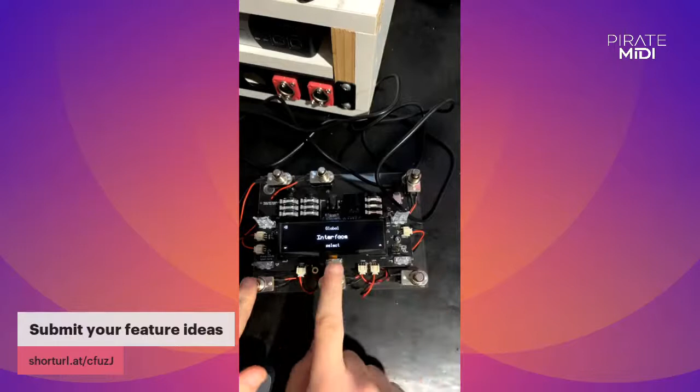So global, we can go here to interface. You can control the LED brightness from here, so you've got low, medium, and high. High is very bright. Simple UI, phone, you can go simple UI. So I'll go back to that - you've got brightness and extended or simple UI.

So we've selected simple UI, hold that to exit, and you can see here now it's just a big bank name. It actually looks a lot bigger in person than it does on that camera feed. But it's maximum screen real estate. That OLED screen is shockingly crisp and sharp, so readable - I can read it from almost 10 meters away.

Yeah, and when you have all 16 characters in that bank name, it's quite large. So you can, we'll go into the menu. As we're discussing, the menu is now accessed by holding in these two foot switches, not just the top left one, to make it harder to accidentally trigger the menu. And it also frees up all of the functionality of that foot switch, which is quite nice.

So we can go to bank name, and we can go through and change this. It's actually really hard to think of a cool bank name on the fly - we'll just add in some special characters here, I guess.

So you get 16 characters for your bank name. Just gonna max it out in a second. There we go. Anyway, we'll max out the bank name so you guys can get a feel for that. And it extends across there, so it's still plenty readable if that was actual letters. Plenty readable on there. We're going to show off some aspects of the configurator, the editor app as well, a little bit later. But for now, I'm just trying to kind of show off the device.

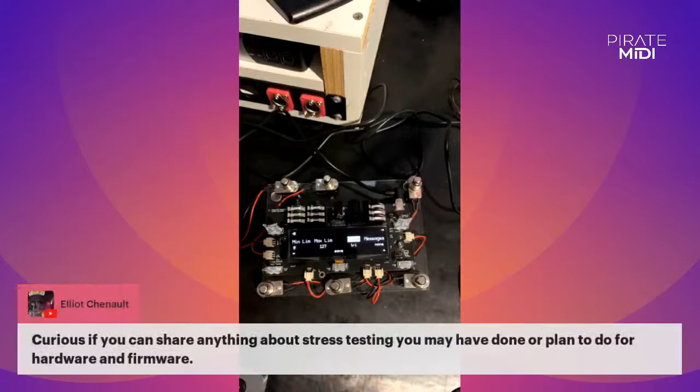Okay, here we go. Curious if you can share anything about stress testing you may have done or plan to do for hardware and firmware. Where's that one? I'm only on Facebook for some reason. Hang on, like the Facebook chat. Anyway, carry on, that's all right.

So, any stress testing? When you are building the firmware, I'm assuming you were testing with large message stacks, that kind of thing, right? I remember seeing some big long lists. Yeah, this is probably more one for me. As far as stress testing goes, I'm not sure whether you're coming at this from a software developer or a hardware developer perspective, just curious, it's a very multifaceted problem. So, for example, if you're talking about hardware and whether it'll stay together under live use, then yeah, absolutely. I gave one of these boxed up to my 2-year-old to play with for the day, and it survived.

It was all jokes aside.

It comes down to things like following manufacturer recommendations for everything. For example, a USB-C connector, how large are your solder pads, what's your reflow profile like. Getting all of that dialed in is how you can help ensure the hardware integrity.

In terms of firmware, it's something that, if you're doing it properly, you really should be doing constantly through the development cycle. So when this was very early days and bare bones, and we were setting up our message stacks, I wanted to make sure that the firmware and the architecture we've created can handle all of that. And yeah, it's running a very powerful, for its size, ARM Cortex M4 processor that handles all of that very, very comfortably. So there's plenty of room to grow.

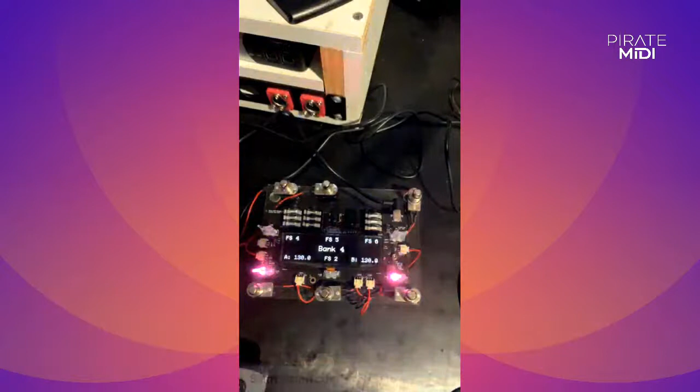Can both independent MIDI clocks be set so that they're synced, for example one is double? Yeah, good question - they definitely can. It's been on my to-do list, a little bit lower priority while trying to get some other stuff done. But absolutely, that's not overly difficult and is on the roadmap, where you can sync one to be a subdivision of the other, so slaved to another, or completely free running. I think that's really important from a functionality perspective.

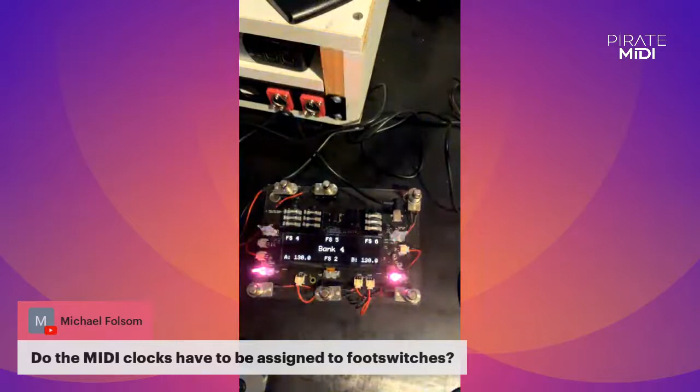Elliot asked a similar question through YouTube - I think it's pretty close to the same question: allow for MIDI clock subdivisions. In fact, most pedals don't necessarily allow for that - a lot of MIDI clock pedals don't allow for subdivisions. It's very common with tap tempo, but not so much with clock. But yeah, Dean, you rock on, mate.

Michael asks, do the MIDI clocks have to be assigned to foot switches?

At the moment, yes, because I've thought quite a lot about this, and I think it's a bit of a toss-up between creating a really nice user experience. One of our goals and the whole vision behind Pirate MIDI is to take away that confusion layer where there's so much going on behind the scenes that you aren't really aware of or in control of, and just make everything streamlined, powerful and easy to use. Part of that was making MIDI clock functionality front and center. Perhaps we might look at adding a user interface element on the screen which could display the tempo information, triggered externally. You can imitate and remotely control a switch with an external foot switch, which I'll show off in a minute. For now they have to be assigned to a switch, but we can look at what's the best user experience for that, for sure.

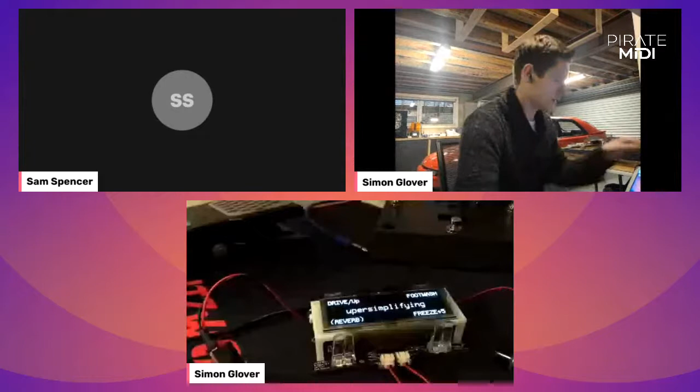But Simon's got... Yeah, let's see what we can do here. Simon, I'm getting some feedback ringing with your laptop. Yeah mate, you might want to just... that's what I figured. I really wish it didn't have to do that. You also are a member of the Potato Pixel clan. Am I? Just a sec. That's better. Oh okay, it's not great.

That's a Bridge4 board there. You can see Simon's got the white display mount, which was one of our samples that we got in, and I sent it over to him. The final production units are black.

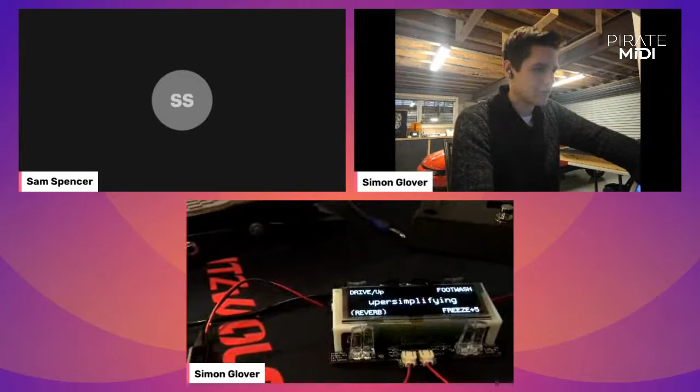I'm gonna do it, platform. Stuff it, so apologies, I'm gonna go handheld. Here we go, okay, let's... whoop. How's that? It's a thing. Yep. Can't hear you anymore. Yeah, can you hear me now? Yeah, I'm talking, I'm just trying to make this thing work. So is that camera readable? Yeah, that's fine. What are you showing off there?

Okay, so I was just going to do a factory reset and go back to the other UI. Here we go, I'll set up my tripod now. Turn this down. Okay, I don't have quite as smooth a setup as Sam, but we'll get there. System reset, factory reset. Yes. I can go around this way. I've got my camera back online too.

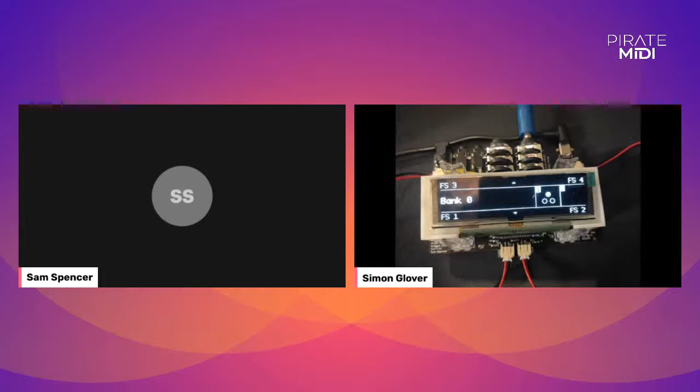And I'll go back out to the menu, and you'll see we've got these three rings here, and when I press a foot switch, it shows us that it's being pressed. Do you want to show that switch in the shot, Simon? It's a little tricky to see what's going on. Okay, so if I press a switch, the corresponding button there lights up. Yeah, I might just maybe clarify what's going on there a little.

So part of that display area you can see there is each Flexi port gets its own bit of screen real estate in the extended UI. Sorry about the potato camera quality. This is something we're still working on and tweaking, but it's really coming together nicely, where depending on what mode the Flexi port's configured in, that section will automatically change. So for an external switch, you've got three different switch options, and because you don't have dedicated LEDs for those on just a standard passive external switch, you actually get an on-screen indicator of what's happening with the switch, which is a really nice additional user interface element.

Let's plug into the other FlexiPort, which is going to wig out that UI there, but we'll just go into the other FlexiPort here.

This is really cool. We've been working on this for the last week or so, adding some nice bits and pieces. In device link, it will show whether a particular port is connected to the network and configured, things like that. So now we have the expression pedal.

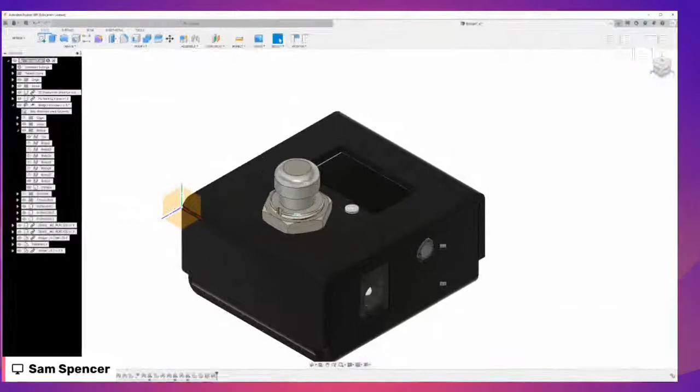But what I might do is share my screen so I can show you guys some cool stuff, because we've got a number of really exciting things that we're working on. So I'm going to share my modeling window. I use Fusion 360 for a lot of our design. Let me turn those joints off. It's not perfect by any stretch of the imagination, but it's what I'm used to and it's what works well.

Sorry, what's good? Sorry, Kira's just loading some print paper up. My wife's trying to print stuff. I'm on a live stream at the moment. What's the matter? No, we're not done. Yeah, if you can do that. Thanks. Love you. Sorry about that, guys.

Kira's great. She runs a sewing business doing kids' clothing and things like that, so she works from home as well. I'm just going to bring my front camera back and chat with you guys.

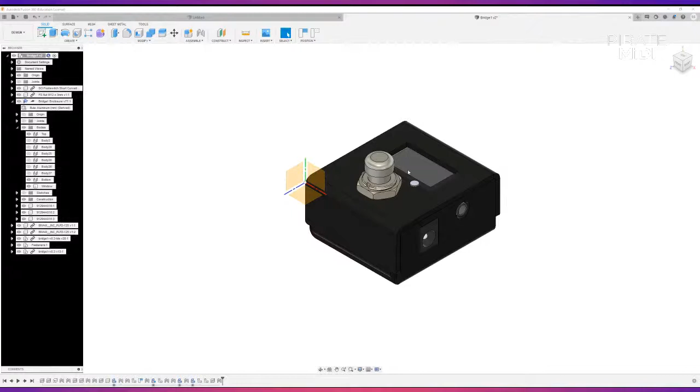There we go. So yeah, we've been working on a lot of different things in the meantime, and because we've had that time, it's been a bit of a nice silver lining to that. If you're in our group, you will have seen that fairly regularly. We love to post new ideas.

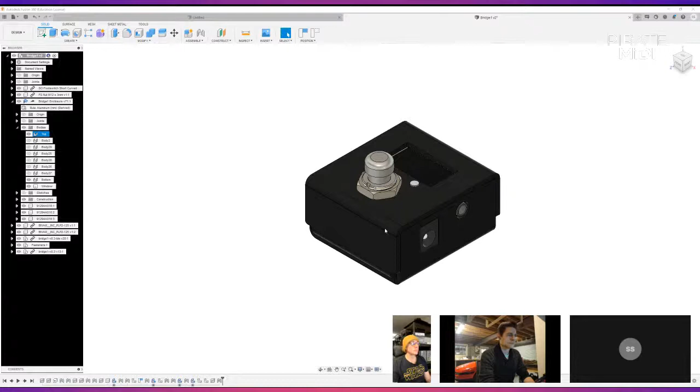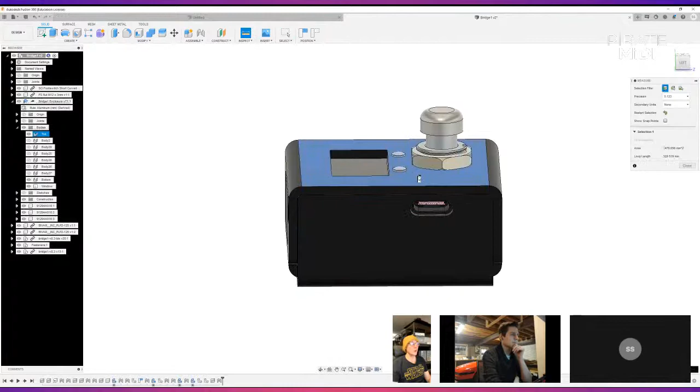And if not, here is one of them. So this is our Bridge 1. This has been something we've been working on for quite some time. You've got a whole bunch of ports, and we've sort of leaked a few bits and pieces, but this thing is tiny. To give you an idea, this is a custom enclosure for this. It is 50 millimeters in length, and it is 44 millimeters wide, but it is only 25 millimeters tall. So this is crazy tiny.

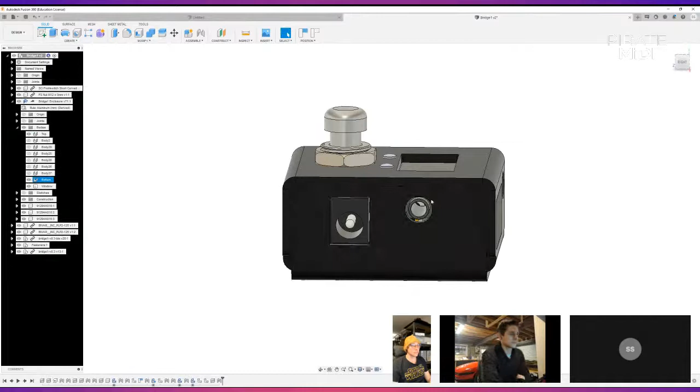That is a high contrast OLED screen there. You've got USB-C. You've got a dedicated MIDI output there. You've got one Flexi port, so you can have up to 2 expression pedals, external foot switches, all that goodness. Your DC in, again, can be powered from DC or USB.

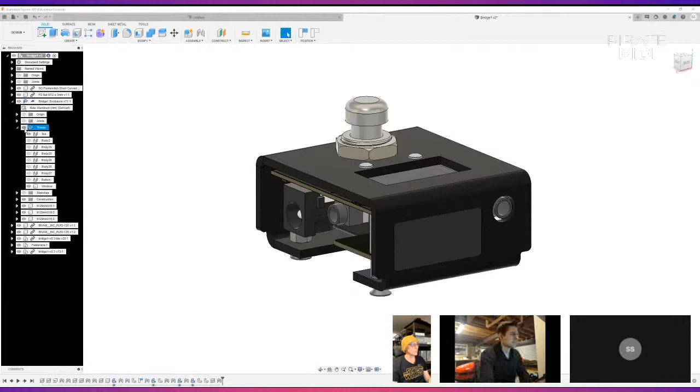And then you might see this and say to yourself, that's weird, what's going on there? It's not a screen, is it? No, and to you I would say, well, let's just take this enclosure off and get all naked with the thing under here. And you see this very deliberately grey box, and that is one of my Bridge 1 prototypes. That, my good people - he does this a lot, flies off to some shelf somewhere - is a Bluetooth transceiver.

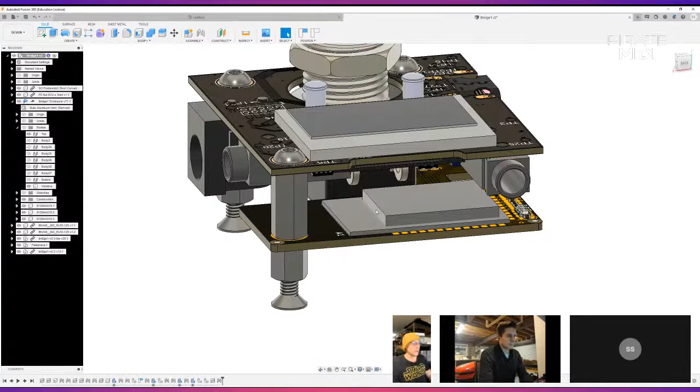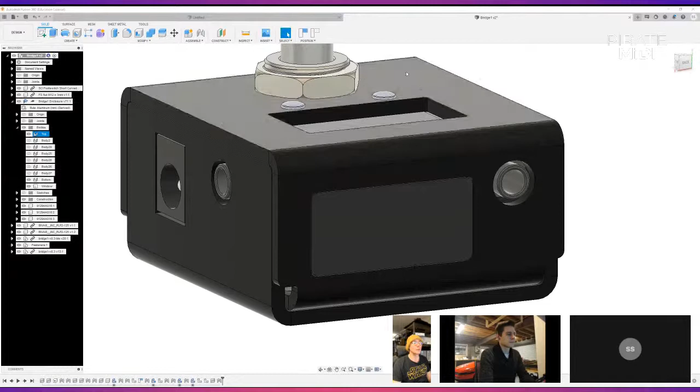So the Bridge 1 is actually going to have integrated Bluetooth, not just integrated Bluetooth, but it actually has WIDI on board. We've been partnering with the guys from CME, which we're really excited about. And the Bridge 1, in addition to everything else, has full WIDI embedded right inside. Now this is cool for a few reasons. One, you get WIDI for free. Yes, it's a wireless window, so to allow for best possible Bluetooth reception, the metal enclosure is basically a Faraday shield, and it will largely attenuate your wireless signal. So you have gaps, a flush plastic section to allow your signal in and out. But along with having WIDI built in, our goal is to have the configuration app available on mobile as well, and things like that. And obviously you can connect it to other Bluetooth devices with all the goodness we love there.

Because it's built in, it actually communicates with the main processor at a much higher frequency than standard MIDI, which is what your external MIDI devices allow you to do. And that opens up the possibilities of device link over Bluetooth, because you can stream all of that data without as much latency. It opens up a huge number of really cool and exciting things, which we're really excited for.

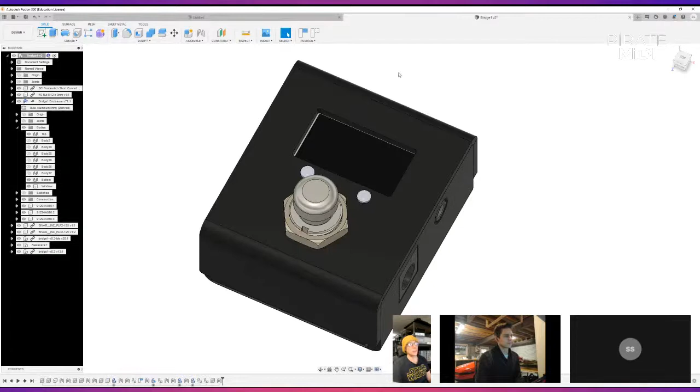So the light pipe looks a little bit different because it's a much shallower enclosure. You still get your dual color LED indicators and things like that. Yeah, that's the Bridge one. She's a tiny little thing, and we're very excited. Those are light pipes, they're not buttons on there. They're just some small domed light pipes on there.

Michael, good question. So we've got the Bridge one. Now, we're not going to spill the beans on everything today. We've got about 5 or 6 projects that we've had in the works over this year, working on in the background. I'd say 4 of those are going to be coming very soon.

But to back up a little bit, to give you an idea of our timeline, I'm going to take that beanie off. It's getting a bit warm in here.

We're hoping to ship out some tester units to a couple of guys later this month, or maybe as early as next week. Then we're going to be shipping all of you lovely people your Kickstarter backer units, existing pre-orders, and things like that. Then we'll be putting the Bridge 4 and the Bridge 6 in it.

Simon, what is that? No, don't know. Okay, don't stress. Okay, very loud.

We'll be putting the Bridge 4 and Bridge 6 up on our website for pre-order for the next batch. Now we're hoping to go to regular manufacturing. So what this will be is we'll take stock of any feedback from all of you guys, make those changes and additions in firmware and the config app, and then basically sign up to pre-order on that. If you haven't already secured one, that will be our regular manufacturing of Bridge 4s and Bridge 6s. You'll be the first to get one of those, which is going to be cool.

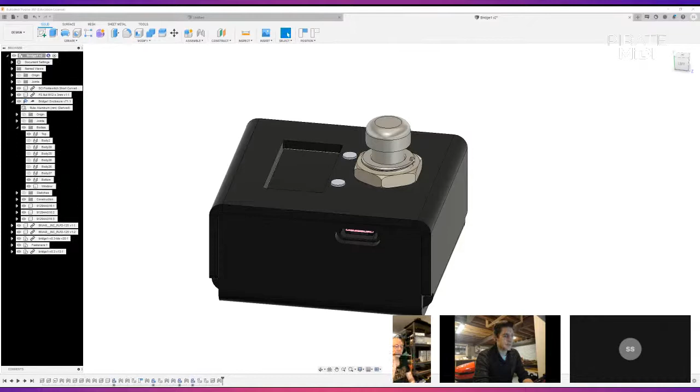For those of you who don't know what the Flexi Hub is, it's got 16 3.5mm TRS jacks. It's in an enclosure, I can't remember the length and width, but it's barely thicker than my smartphone case. When it's in the enclosure, it's very cool. Can you see it? So yeah, I'm just going full screen.

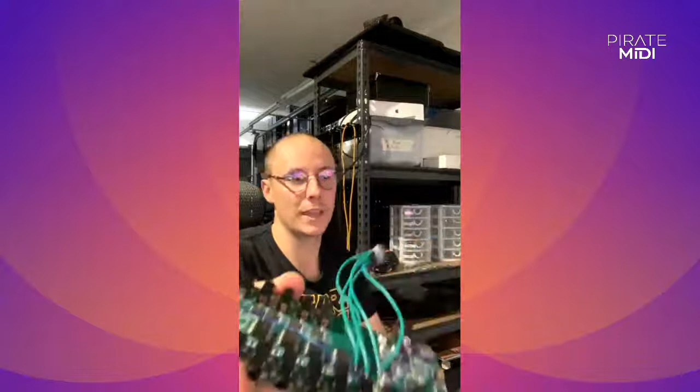Before we move off the relays as well, what that means with TRS is you actually get 2 relay switches for the price of 1, in a sense, in that it's not just a mono cable switch.

You actually get independent relay switching of the tip and the ring as well. So you could use a splitter to control 2 different TS channel amps, or if you have an amp or another device that uses a TRS foot switch, then you can fully control that as well. So that's pretty cool. But yeah, this is the board here with all those jacks.

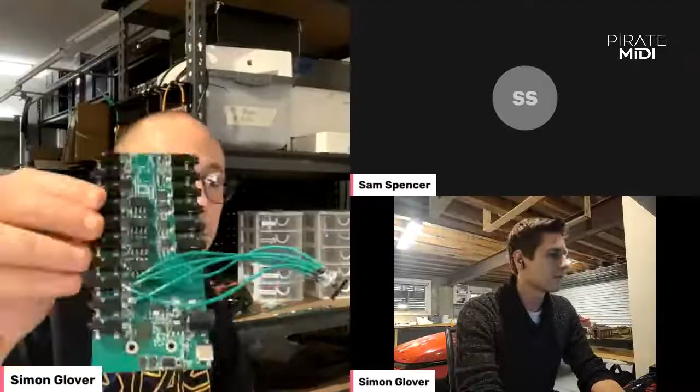Again, ignore those wires, they're just programming headers and things like that. We've had this in prototype for a while. We've just been waiting for the supply chain situation to stabilize a bit, but that is also going to be coming very soon to you guys. We've managed to work out most of the kinks in that. It's mostly due to the microcontroller stuff, right? Yeah, one of the shortages.

One of the really neat things about this is it runs what I'm calling the filter and transform engine. What that means is you've got all of these different ports - raw MIDI, expression pedals, control voltages, external foot switches, the works. The filter and transform engine allows you to have a matrix of inputs and outputs. So an input might be a MIDI input, and then an output might be a control voltage. On your MIDI input, you can assign MIDI triggers, you can do all sorts of things like that, and then you can route it to any of the other output ports in whatever way you like. For example, when this MIDI input receives CC 100, send this control voltage to this expression pedal output. You can do that for every combination of inputs and outputs, all simultaneously.

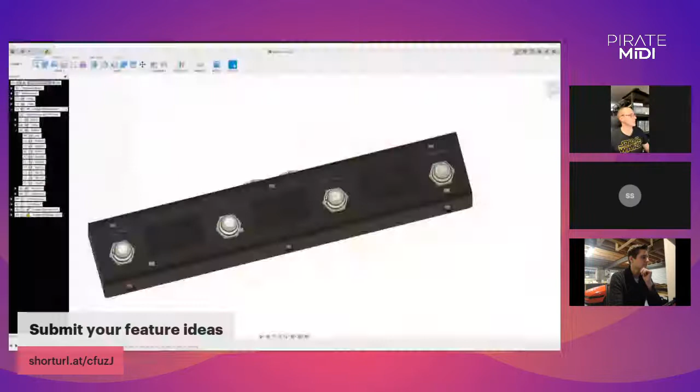So we have here something we teased about in our group a little while ago. Ignore, there's no screen models in there, but that's where the screens are. We have a Bridge4 Slim.

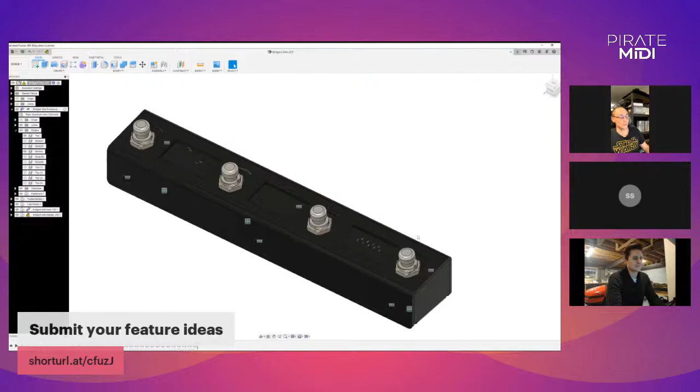Now this guy is super cool because it's like a single row MIDI controller. Now you get all of the power of a Bridge4, which is all the power of a Bridge6, in a 4-foot switch format, in this really skinny single row form factor to put underneath something like a Stomp or your large big box devices.

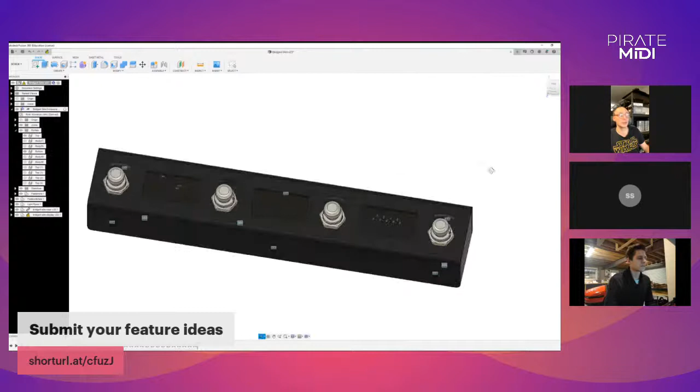And you actually get 3 displays across here to show a ton of information on. So super cool. You still get 2 FlexiPorts, your MIDI in, your MIDI out, USB-C, DC input, all that goodness, and your dual light pipes for the LEDs there.

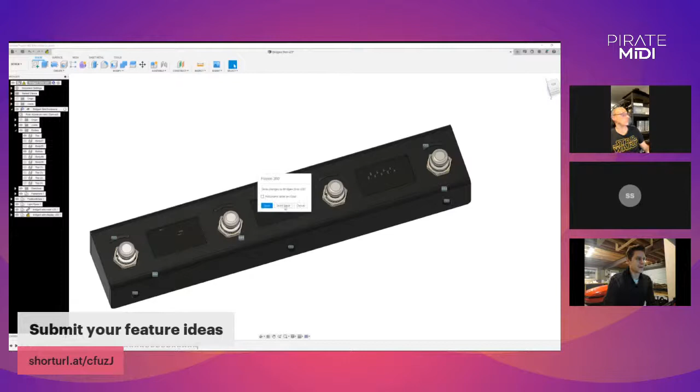It's been a lot of fun to design them. That is going to be coming really soon as well. Stay tuned - because that doesn't need anywhere near as much development time.

Yeah, it's a Bridge4 with a different enclosure and a different screen layout. Take your Bridge4, you squish it down, you get a Bridge4 Slim. It's beautiful. Beautiful. Yep, poetry in motion.

Yeah, so things like those injection molded parts are all the same. So it's just the enclosure, testing PCB layout, and that's pretty much it - adjust the firmware for those 3 screens.

Something you might not realize is that creating the form factor for our bridge devices has required a lot of injection molding, and injection molding plastic is really expensive and takes a lot of time to get a mold done. For something like a light pipe, we have a taller version and a shorter version to match the slanted geometry of our enclosures. We've done several iterations of these. You have to get a mold made, which costs thousands and thousands of dollars, then you have to get your sample runs done. It's a very complex process getting injection molding tooling done.

I think the file iterations on the light pipes got up to like version 55 or something. Oh yeah, but that's nothing — some version iterations get up to hundreds. It's pretty crazy with files going back and forth between the manufacturer.

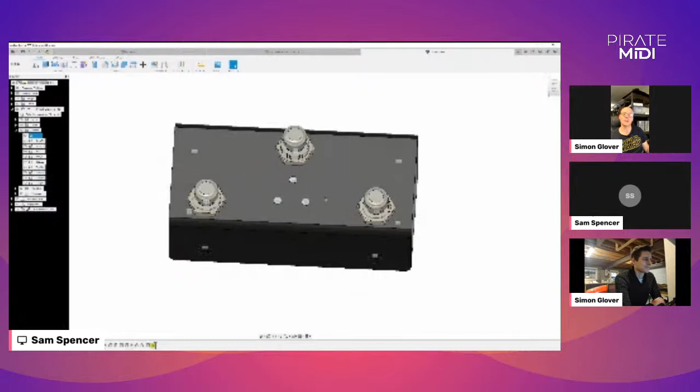And then I actually thought a bit more about it. What I wanted to do was our own take on an external auxiliary foot switch, but with some secret sauce — and that secret sauce is, it's actually a MIDI controller too. You might notice this little 3-dot layout, very similar to the user interface on the Bridge that Simon showed off with his external foot switch, and that's because it is. This is a powered device — I'm just showing the enclosure here so I don't give too much away. I can even show the PCB here too. This is a very cool little device.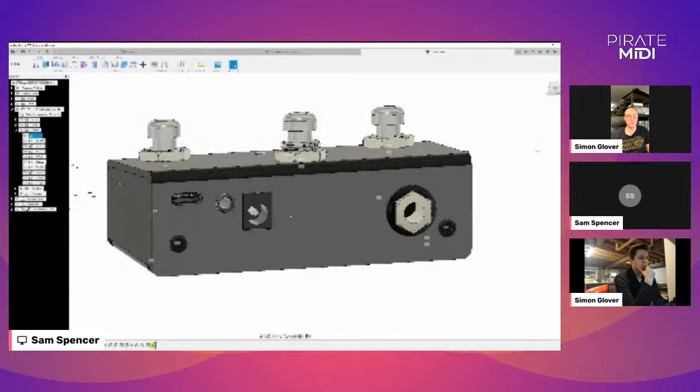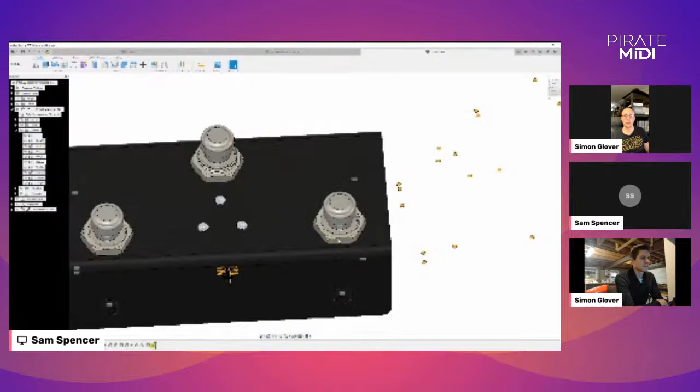You can use it in a couple of different modes. One, it can be unpowered and just be an auxiliary foot switch — the LEDs won't light up, obviously, but it will just plug into your devices and be a really nice, perfectly spaced, slanted enclosure external foot switch. Or you just power it via USB or a barrel jack input, and you get LEDs on there as well in real time showing foot switch behavior and things like that, even when it's just acting as a generic external foot switch on any other device.

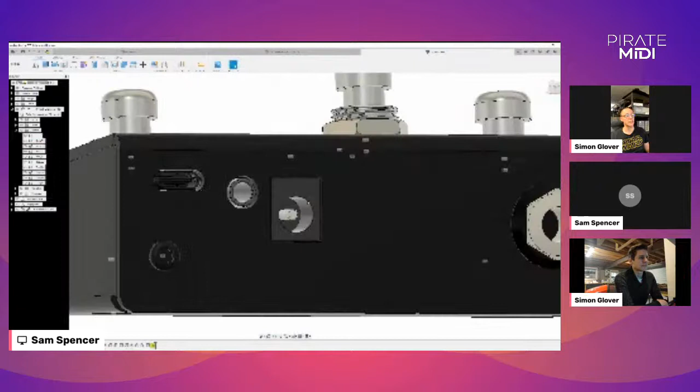But it also has a small brain in there, a microcontroller, and some of our Bridge architecture, so that you get USB-C, a dedicated MIDI output along with the auxiliary switch output. So this, while not having the same power and flexibility as a Bridge controller, gives you a MIDI controller with some message stacks on there, USB-C, all that good stuff. And we're really hoping to hit that sub $100 mark with this device. So if you need a simple, cheap and cheerful MIDI controller to do a couple of things, like maybe a MIDI clock and some bank up and down, that might be a great option for you.

Or you want it can be an auxiliary switch at the same time as a MIDI controller, so you could have it being an aux switch for a non-MIDI device, and then also sending MIDI data to your other MIDI devices via the MIDI output.

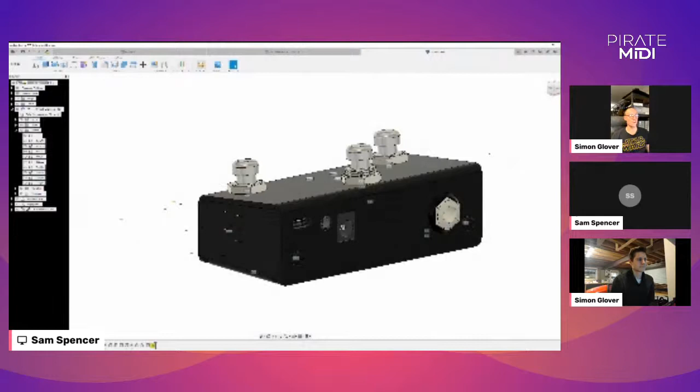It will work with our configuration app. This is super exciting, and it's going to be awesome. It's really low profile too. It's only at the tallest point of the enclosure, about 32 millimeters tall. So it's really compact, really nice. Can sit perfectly in front of your Bridge device. So, bam, you've got more switches, light pipes, away you go.

Sweet. I'm excited about it, and I'm sick of pretending I'm not. Yeah, all right. Well, I've got one last thing to show, and that is the,

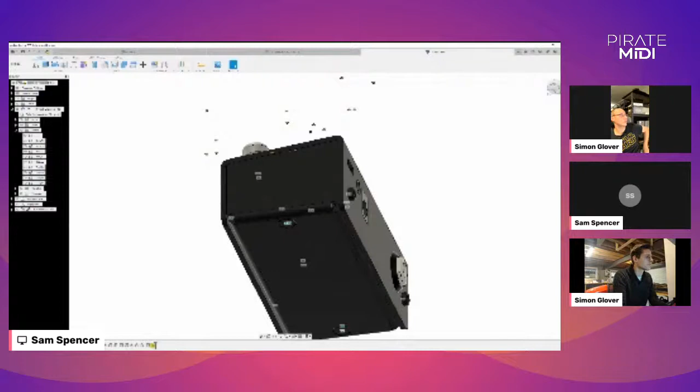The user manual, just quickly, and I think that can be it for today. What do you reckon? Yeah, we're going at this for almost 2 hours. It's great. If you guys have any other questions, get them in now. Doesn't have to be about the Bridge in particular. It can be about really most things, but send them through while Simon's bringing this up.